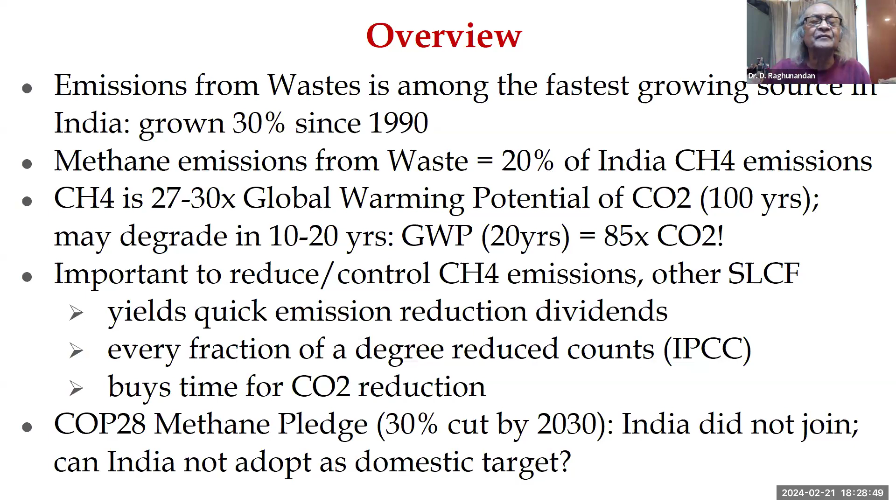Next. Yeah, so the broad status in India with regard to waste treatment is, and I think our panelists would agree with me, that currently waste handling and treatment is rather poor, is quite unregulated despite the existence of various rules and laws, and neglected, even in the large metros where there is some capacity investment, etc. So the conditions in smaller towns and cities may well be imagined.

Solid waste, there's some debate about these data, is quite uncertain, and is probably an overestimate anyway, as stated, which government agencies tend to do. We are collecting roughly 70% of waste generated. Maybe 20% of that is being treated, and the rest just simply lands in what are called landfills, but are really dumps in unhygienic conditions, polluting air as well as the water through seepage, etc., causing other health hazards through the emissions there. And you can see the methane seeping out with flames coming out, etc.

The sewage treatment capacity also is only about treating about 19% of sewage generated. But if you look at capacity utilization, that's only about 72% or so. And therefore, the net amount comes to only about treating 13% or so of the sewage being generated. So much work is needed in the metros and even more in the tier 2 and 3 towns.

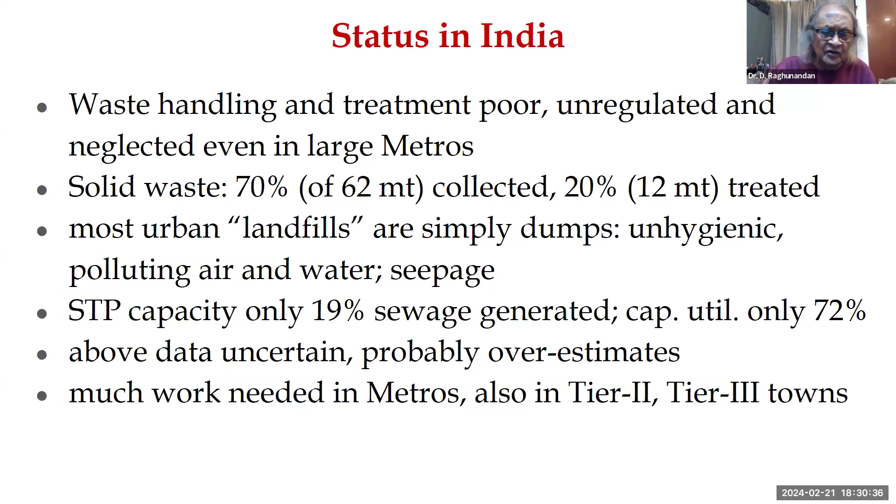Next, please. So the issues, I think, are the technology used both in solid waste as well as in sewage treatment, I think, are quite outdated. They're very far from international standards. We need to address this problem as a multidimensional approach. And a common approach that we are following in our approach paper, etc., is we are looking at these issues as problems which can yield multiple benefits or co-benefits.

Now, the co-benefit argument is it depends on your perspective, what you consider to be the main benefit and what you consider to be the co-benefit. So it's very useful to think of maybe not benefits and co-benefits, but multiple benefits. Co-benefits are useful to think of in terms of how you convince people, how you motivate people, policymakers, the public, to join such programs, to support such programs.

So a way of selling the issue of handling wastes, of treating waste, both solid and sewage, is that it will improve the urban environment, it would improve hygiene, it would help reduce pollution, improve public health, and as a side benefit, if you like, it also helps in reducing emissions. Because it may be difficult only to speak of emission reductions to public and policy planners.

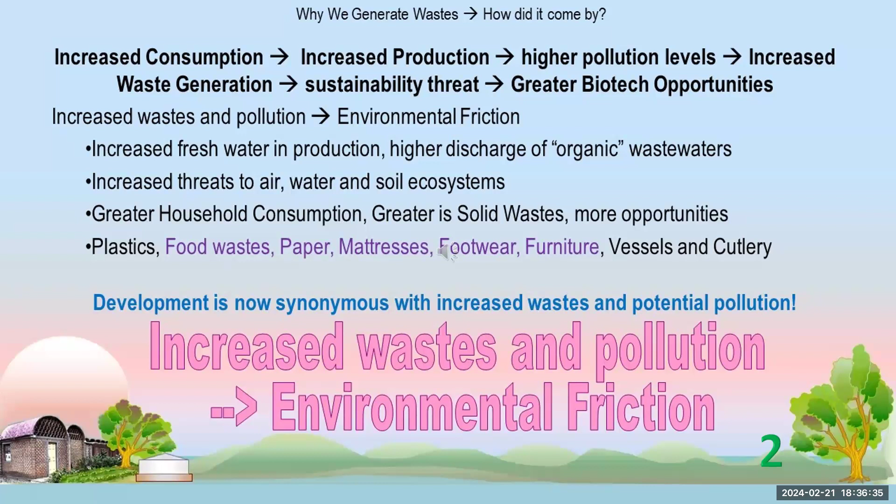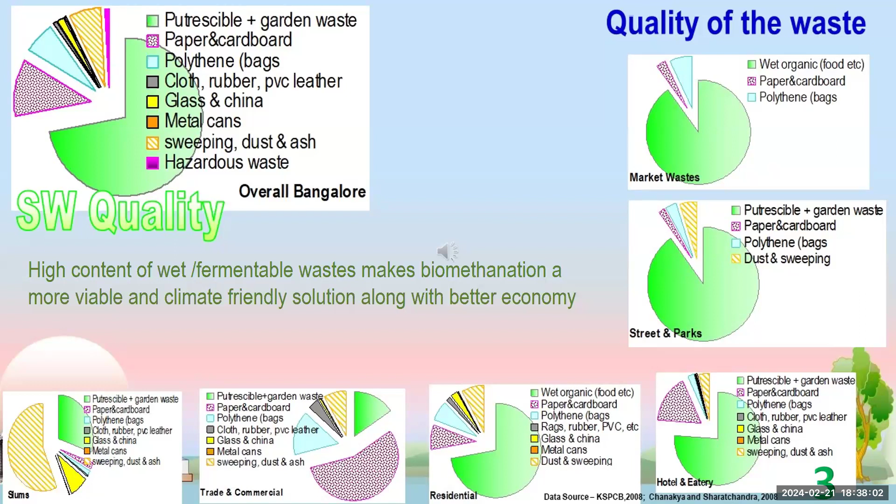Also, we find a lot more recyclable materials like metal cans, paper and plastic, cardboard, which were not there in the past, and this is something important. And since we collect them separately, the wet and the dry, it allows us to go in for a better way of recycling and reuse. And let me come back to this a little later.

Pointing out that the wastes were predominantly organic and fermentable leads us to the obvious question: do we compost or do we go in for biomethanation? Biomethanation seems to be a lot more environment friendly, as one, the methane is not being released. Second, the methane is captured and replaces fossil fuels. More important is that it also retains most of the nutrients. There is very little loss of nitrogen.

Another important issue is to understand that biomethanation as a process for urban wet waste has not been something new. Down here in Chennai, it has been tried for as much as 20 years now. But what is important are these pilots, which have shown us that it is as a process quite stable, quite easy to handle. And the bigger issue is how do I make it into a business deal. I'll come back to the business part in the next slide, in slide 5.

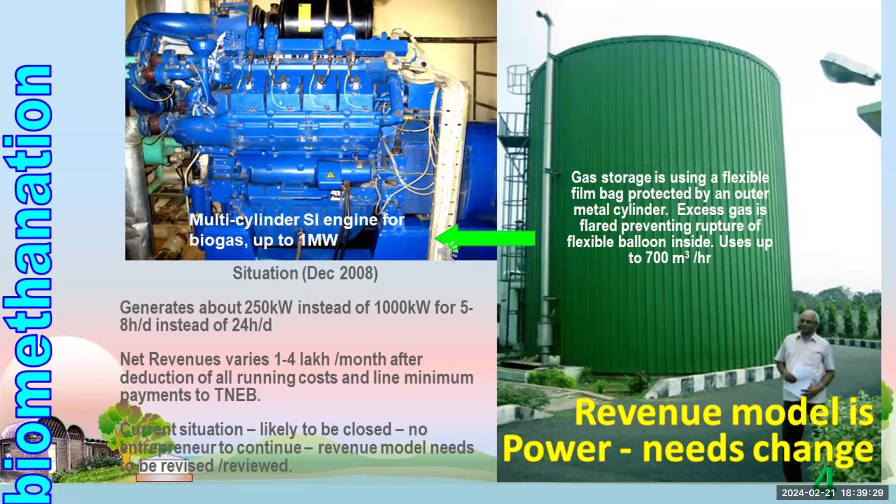To reinforce the thought that the concept of biomethanation for urban solid waste has been some time with us, I'd like to show the example of the town of Siraguppa in Bellary district, which managed to treat all of its waste without using a landfill for over 10 years. And what it did was all the wet waste it collected was subject to biomethanation. It generated power, and the residue was converted to vermicompost for its own gardens.

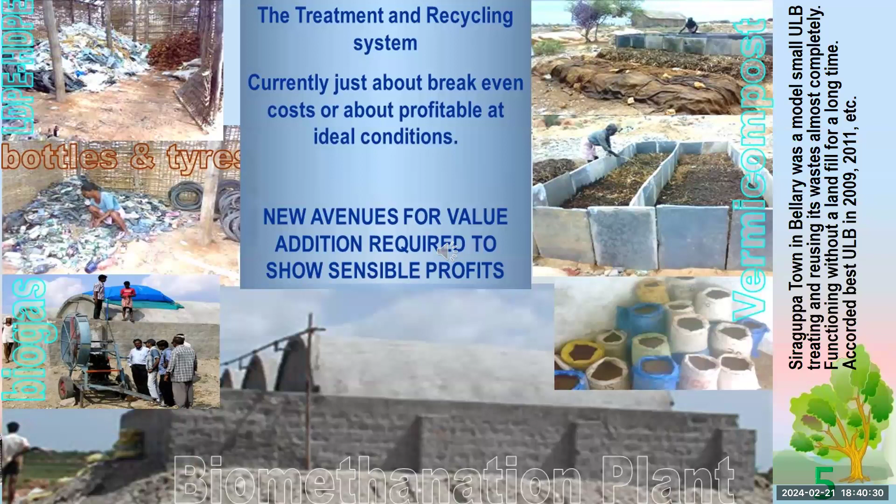While on the other hand, the dry waste was almost completely recycled, and they were not using a landfill for quite some time. This was a model small town which won the best town prize for about 2-3 years in a row.

Like this, the biomethanation of urban solid waste, which is really a wet mass with roughly 80 to 85% moisture, has seen many such starts. I call them false starts because they never turned to become a business proposition. So now it's all set for the final dash, thanks to a large extent to policy support and the market readiness the technologies have now achieved.

Very clearly, as you see in this slide, a ton of urban solid waste on the lower side would produce about 20 kgs of bio-CNG or CNG equivalent, about 50 kgs of compost, 700 liters of liquid fermented organic matter, organic manure, and carbon dioxide, which is used for disinfestation. All this put together has today a market value close to 2,700 rupees. So per ton per day, this translates to close to 10 lakhs per year.

And the cost of a full-scale plant is about 20 lakhs per ton. So you can see that the payback period has really crashed now. And so the question is, are we all now ready to take this path with this kind of policy support? Very importantly, many of the progressive towns have already taken this route and are on the verge of becoming successful.

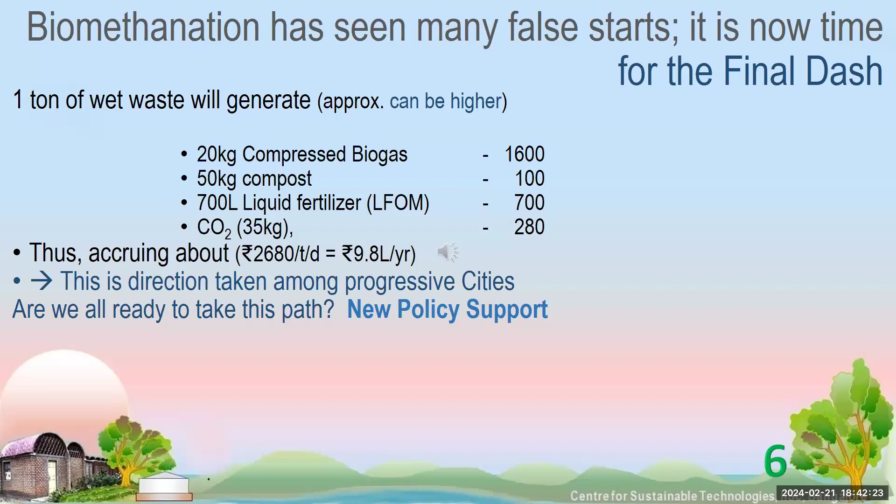For example, from the digested residue, if it is predominantly leaves, then we can generate mushrooms. If it is banana leaves, then you can make fabric. If it is high lignin material, you can convert it to lignin formaldehyde, or you can use this material as a biofilm support for anaerobic reactors. The liquid has already been shown to have some pest repellent properties, but it can definitely be used in aquaculture or algal culture. And should it have a high lignin content, then you can also induce ligninase enzyme, which can be used for other purposes.

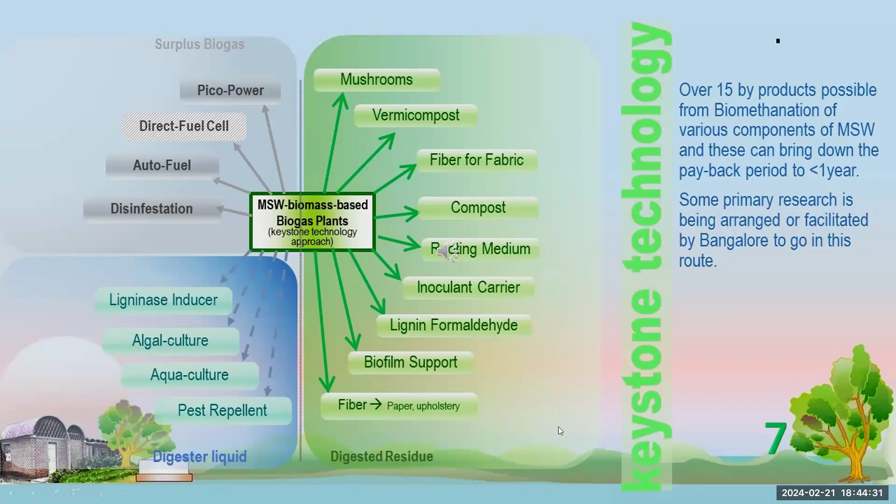Here in slide 7, I want to emphasize that although we are already looking at 15 byproducts, an interesting phenomenon that has happened, which I couldn't generate enough visuals on, is that as our lifestyle has changed, a lot more products are being generated from the dry segregated waste: from thermocol, styrofoam, corrugated paper, multi-layered plastics, and also different types of polyethylenes.

Now, I just visited a startup which was making designer tiles from plastics for indoor use, and that would be much more attractive and more value addition. So per kg you would get a lot more value. And this is the change you're seeing: the products that can be made from waste and their multiple uses are expanding, and especially many startups have taken up this area.

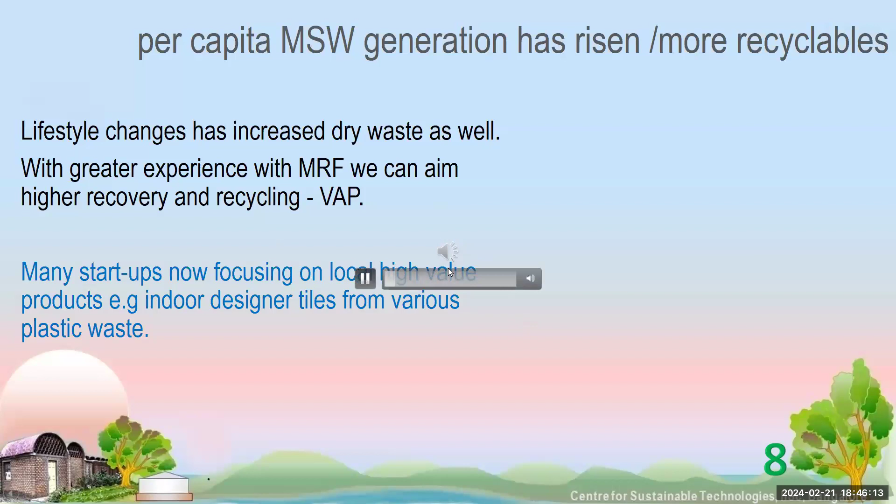Coming to the area of wastewater, all of us know that about 80% or more of the water supplied to houses ends up as sewage. Many cities have started recycling this for various purposes, especially for local uses. And as a national policy, we have now tried to bring it into various schemes so that water is treated and reused locally. Even in rural areas, as we have supplied more than 55 liters of water per capita per day, most of it is now turning into grey water.

This grey water somehow ends up, because every village has some water body nearby, contaminating it. The most important part is how do we treat this water locally, prevent it from contaminating local water bodies, and find a very sensible and economic reuse sector. And please remember, sewage and grey water have different problems. Sewage has only human waste, whereas grey water has a whole lot of household chemicals, which makes it a lot more difficult to treat.

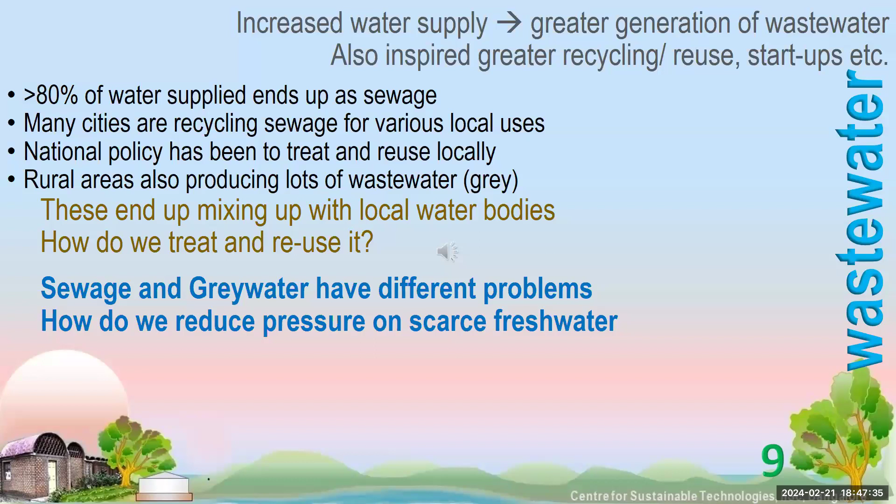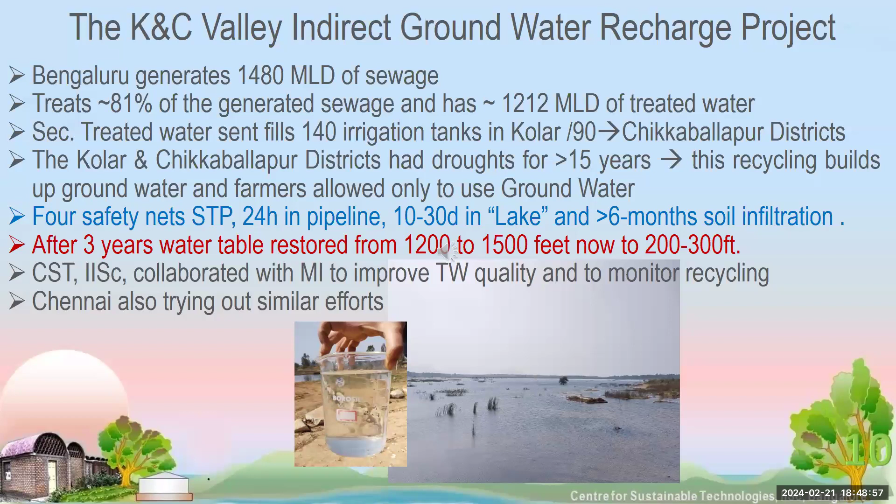Now, Chennai is also trying something similar, where it's trying to improve water security, especially drinking water security. Here it must be understood that each location will have a different set of problems you want to solve. What has happened in the last 3 years is that the impact of droughts has now been reversed, and land alienation, which was a very common phenomenon, has also been reversed. Horticulture is back in vogue, and that has become the tomato capital of the country. Out-migration has been reversed. Industrialization has started.

And as you see in the pictures, the tanks are almost always full throughout the year. And the water quality, as you see in various containers there, is quite clear. So this treated water has become a high-value commodity for the local people, and has also become an exemplar for a large part of the world, because this is one of the largest in Asia, and in the world it reaches out to a huge number of people. And that's how it stands as an example for others to emulate.

Based on these kinds of successes, water recycling and reuse locally has become a very important aspect of various urban habitats. So much so, in a couple of cities now, the concept of a waterfront, even in a semi-arid area, has become possible because recycled water has been brought back into local use. People are restoring local water bodies, sometimes merely for aesthetics, sometimes for creating bird habitats. And of course, in Chennai and various places, water security also has been looked into.

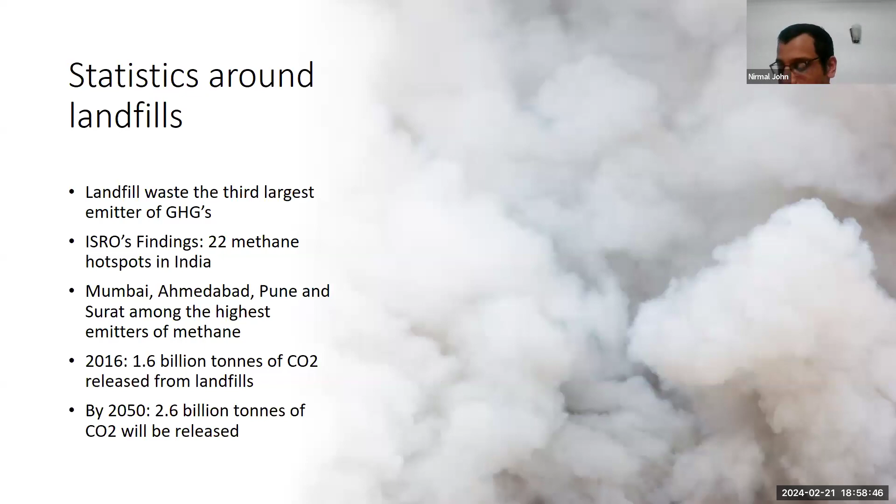Methane is particularly dangerous because it's primarily responsible for landfill fires, particularly during the summer seasons. We saw that happen in Kochi last year. We saw this happen also in Delhi's Bhalswa landfill as well. But there is a way you can circumvent all this.

Studies have shown that you can reduce your greenhouse gas emissions by 6 to 8% if you're actively involved in reducing your food waste. You can prevent food waste from going into landfills by either composting it or converting food waste into biogas, which is a cleaner alternative, of course, to fossil fuels. Hence, waste segregation and subsequent composting of waste is vital, as it not only prevents the release of methane gas in landfills, but can play a significant role in preventing the accumulation of waste in landfills.

And I'll end here by talking about the kind of work, among the many things we do at Chintan; we've also been very actively involved in the diversion of this waste from landfills. And we've been doing that through an MRF that we had instituted that was recently commissioned in February 2021.

So in Feb 2021, Chintan, with support from the Municipal Corporation of Delhi, North Delhi, and with funding from the Coca-Cola Foundation, was able to set up a material recovery facility in Zakhira. Zakhira, for those not familiar with Delhi's geography, is in North Delhi.

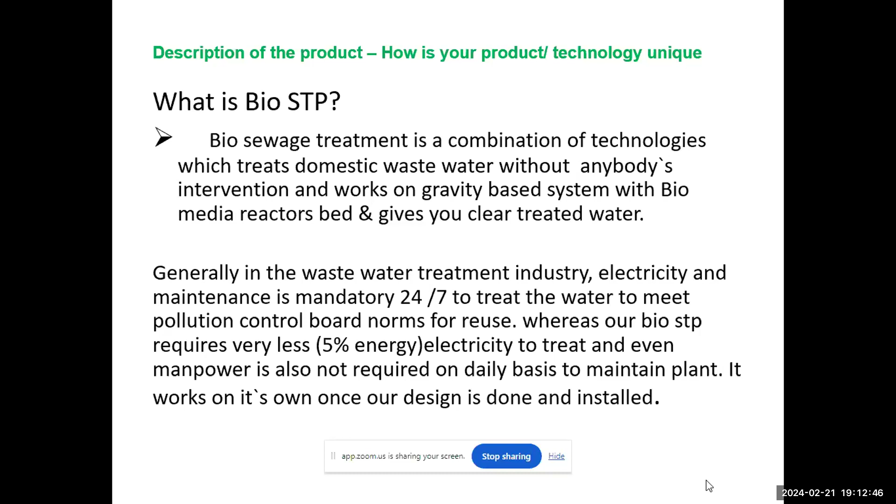In this bio-STP, the biggest advantage is we don't require operators at all. The entire plant runs on its own because 90% of the process happens through the media along with a gravity-based system. From collection till the final treated water tank, it happens only by gravity, meaning we don't require any operators to run the plant.

Number two, we were talking about methane emission and carbon footprint. Here the carbon footprint is saved by close to 90% because we don't use any pumps and motors at all. 90% of the plant treats only through microbes, enzymes, and media. The media life is also a minimum of 20 years, and that media need not be replaced every year. 20 years is the minimum, it can go beyond that too. That's the kind of media we provide.

It is almost like a fit-and-forget treatment plant. The biggest advantage in the final tertiary treatment is that even a slight odor is not acceptable to people, they find it very offensive. That is where, to support them additionally, we give a final treatment process of ozonation, which kills the entire microbes in the system and makes it 100% crystal clear, odorless water that meets pollution control board norms. You cannot even tell the difference between RO water and sewage treated water, that's the kind of quality we deliver. This is because we use ozonation at the final stage, which oxidizes further and removes all the suspended solids to make it clear water.

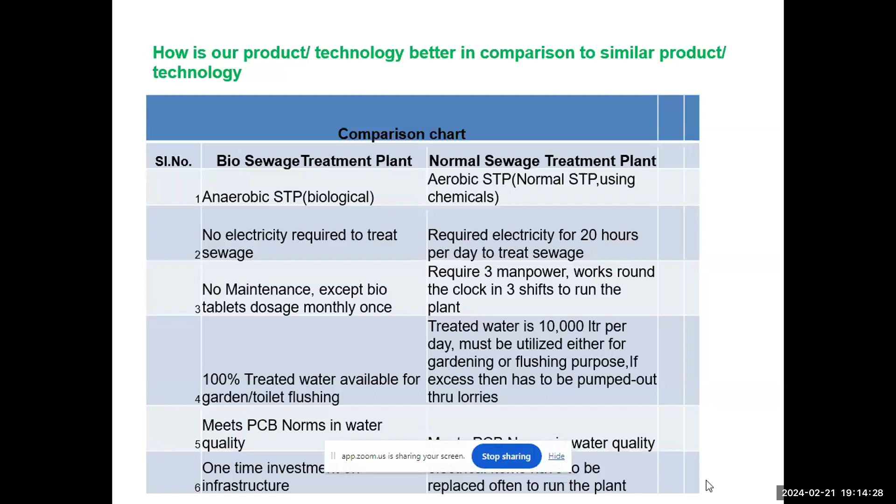The biggest outcome of the technology is that we can reuse this water, or release it into a lake or river, or use it for underground recharge. We can control soil and air pollution, and save huge amounts of water by recycling it. One use is toilet flushing and gardening, but mainly I am exploring selling this recycled water.

In the previous presentation he was talking about it, but I am already on the job in Bangalore. Today we got about 3 lakh liters of treated water that a client requires. They are willing to pay for both transport and the cost, about 350 rupees for 6,000 liters. We finalized this today; over the next 4 days he needs about 3.5 lakh liters of water, and we have a 100 KL plant in Bangalore. We tied up both parties, and now the vehicle is ready.

One side earns the money, whoever has put up the plant. The other side, the buyer, is actually in the construction industry. He is buying this water for soil excavation and leveling, and also for construction purposes. Imagine 3.5 lakh liters, if he buys fresh water, how much cost would he incur? And in this summer, they are not able to get water at all.

That is where the demand for treated wastewater has come up now, and we are getting lots of inquiries. Our focus is that whatever water is treated, when it meets the parameters, that water definitely has a use for industrial purposes, gardening, and agriculture. In this summer, agriculturists are struggling a lot to get water, their bore wells have dried up. By making these STPs functional, this treated water can help, because most apartments with 100 KL or 200 KL plants are only able to use 30 to 35% of the treated water.

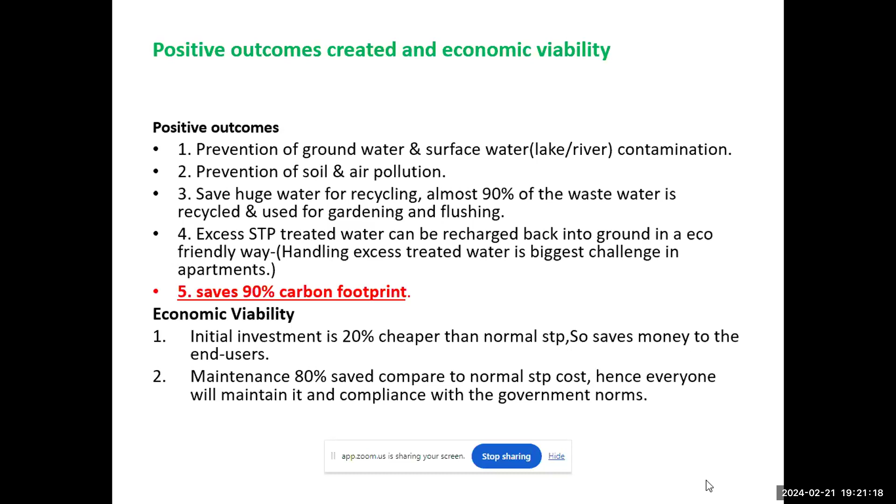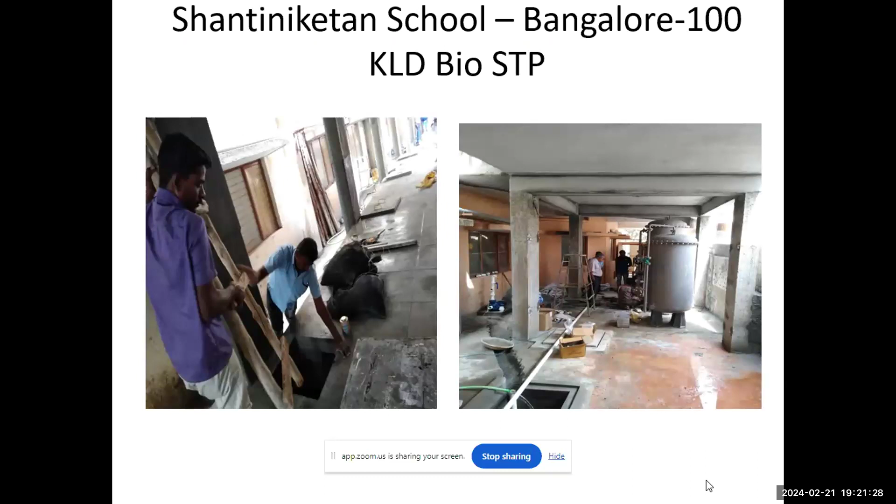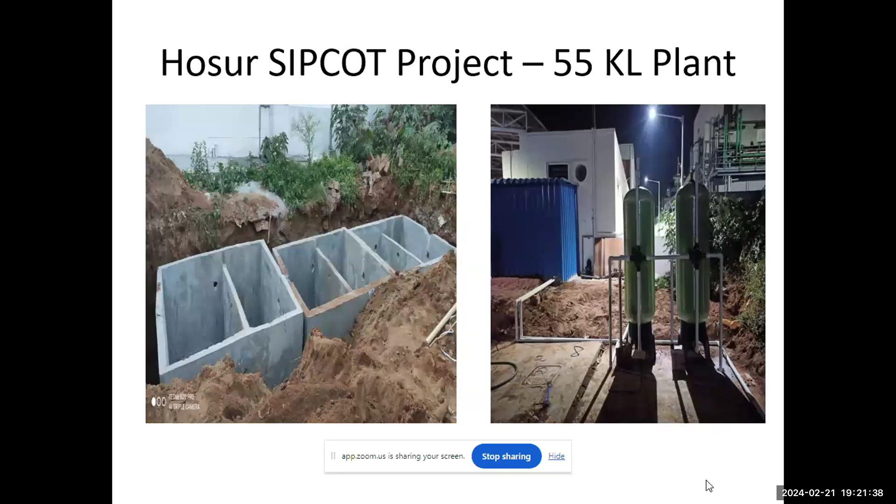I want to showcase some successful projects. This is in Shantiniketan in Bangalore, about a 100 KL plant running for the last 5 years. This is another project, a 50 KL plant for a Star Hotel. And this is a Hosur SIPCOT project, a 55 KL plant running for the last 1.5 years. This is the treated water quality.

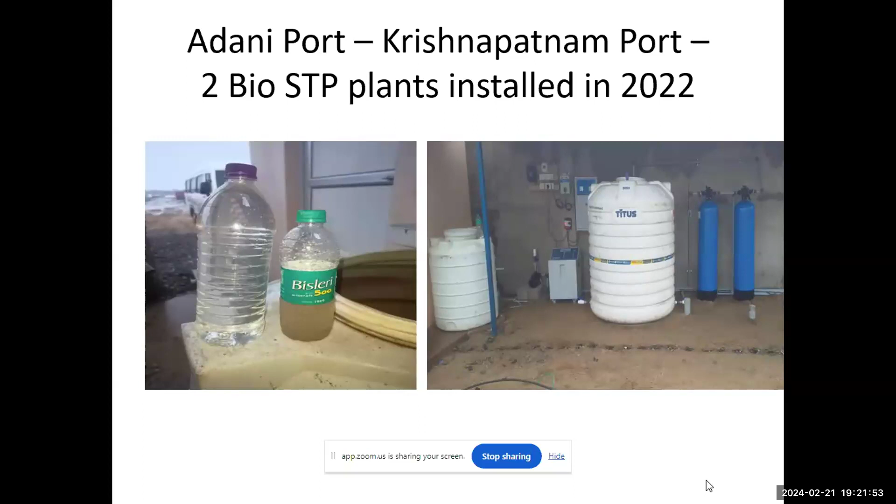This is Adani Port in Nellore we have done. One project last year, and we executed a second project also. This shows how happy the customer is.

This is Tamil Nadu Golf Federation, on Mount Road. Here, the beautiful thing I've done is, for ETP - effluent treatment plants - you have more contamination due to oil and grease. So we applied one more application where we use oil cakes treated with colonies of bacteria which degrade the oil in the chamber itself before letting it out to the collection tank. From there, as usual, through the bio-STP process, we treat it. It's running very well here.

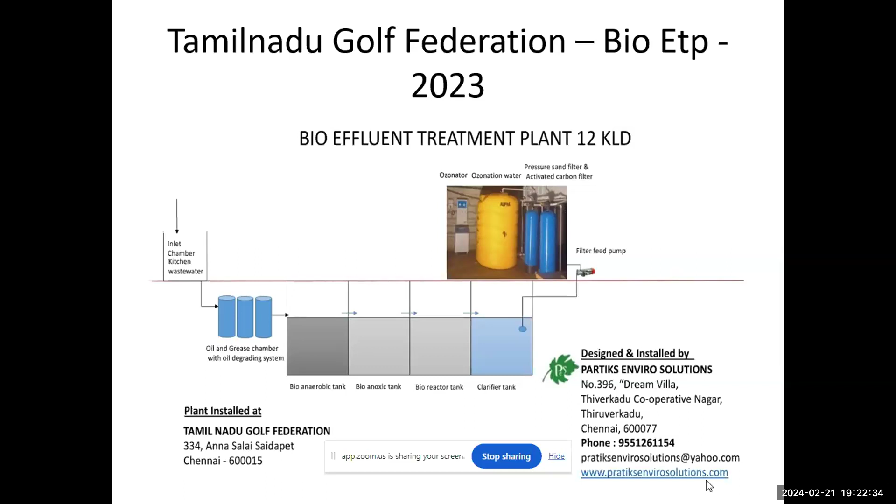They'll only have a little bit of gardening, because most smaller apartments with 5 or 6 houses never have garden space. So in that case, where do they let out the treated water? That is the challenge - everywhere we go, ultimately they're willing to invest money for the STPs, but they don't have an option for disposal of the treated water.

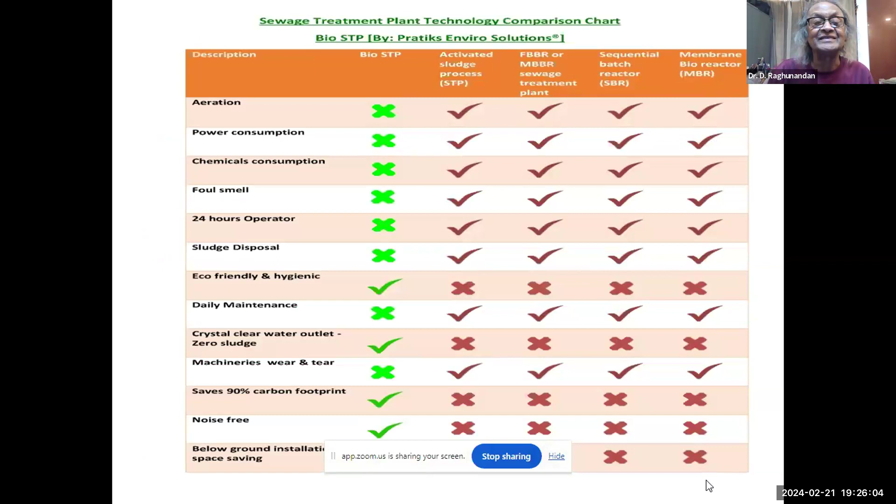And this is the comparison chart. Anyway, you can go through it. Maybe all these test reports, we can share later also.

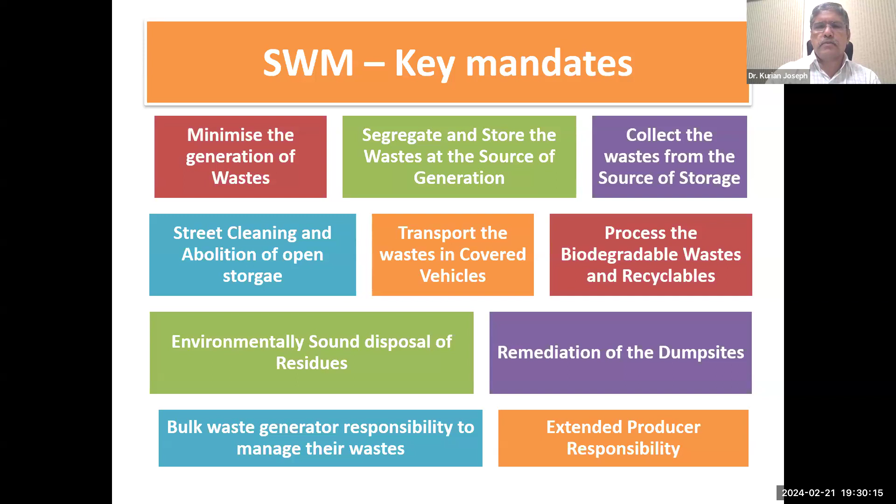And there are also specific responsibilities for those who generate this waste in bulk and also those who are the producers, especially of the packaging category, in terms of extended producer responsibility. In spite of this legal framework, all of us are aware that there are deficiencies, which start with poor segregation, limited storage in public areas, transportation in open trucks, very little processing, and unscientific disposal.

And if we ask why it is happening, we have several reasons to put and blame on each other. Very often the challenge, especially from the municipalities' point of view, is that they say the public is not aware, not cooperating, not participating. We don't have land to locate the facilities, and the private people are driven by profit. So we are also not able to create an economically viable business model by which private entrepreneurs can come in and play a crucial role in waste management.

It is in this context we should look at the waste management and climate change connection, as already indicated by Dr. Raghunandan in his introduction. There are several positive and negative connections between solid waste processing and climate change. And it starts with emission of methane, which comes from the biodegradable waste which we dump.

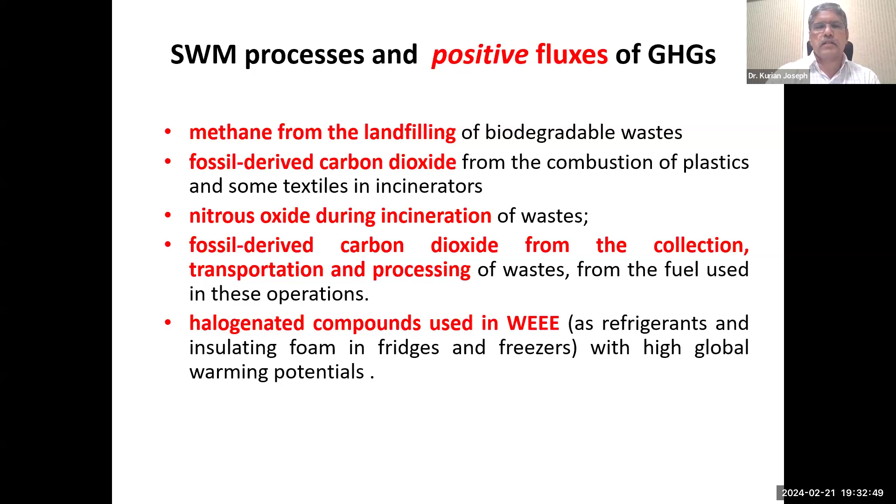And it is also connected with the burning of plastic, which is similar to burning of fossil fuel, because the origin of plastic is fossil fuel itself, nitrous oxide from combustion processes, and the carbon dioxide that gets emitted when we burn or use fuel for transportation or processing of waste, and especially electronic waste. There are also other types of greenhouse gases.

Now, solid waste processing also has negative fluxes, which means it can help in addressing climate change in terms of the energy that we could recover from the processes to replace energy from fossil fuel-based sources. Recycling of waste limits the need for producing new materials, which is energy intensive. So the energy efficiency that we get in terms of material recovery, reducing, and also the use of compost, which is an excellent additive to enhance the soil carbon and also carbon storage.

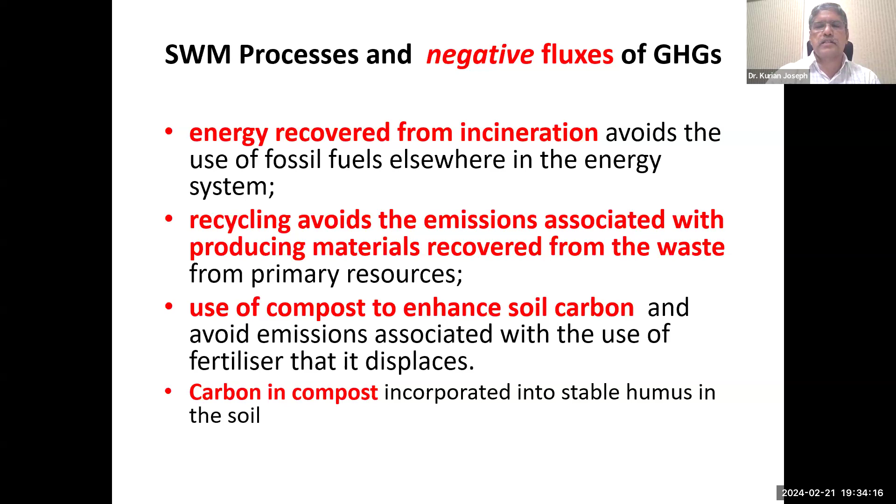The carbon in compost, if we can incorporate it in the soil, that is a long way of storage of the carbon, because the carbon from the atmosphere is fixed in biological materials, and that we compost and put it back. We are in a way capturing the carbon from the atmosphere and storing it in the soil. So there are positive and negative connections.

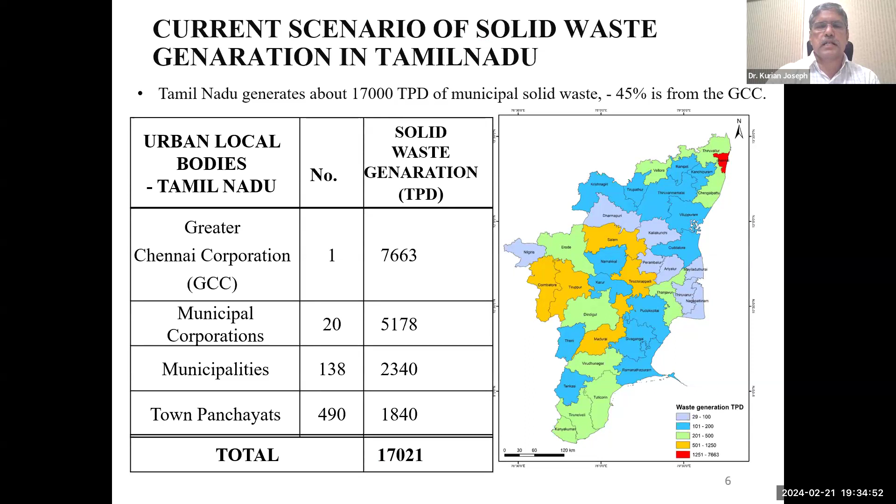And when it comes to the waste generation scenario in Tamil Nadu, we have done a recent assessment which tells that about 17,000 tons of municipal solid waste is getting generated in Tamil Nadu, of which almost 45% is from Chennai. That is about 7,600 tons every day. And of these 7,600 tons, in terms of wet waste processing, about 1,000 tons get processed in micro composting centers, bio-CNG plants, green waste, that is garden waste processing, and also small biogas plants, etc.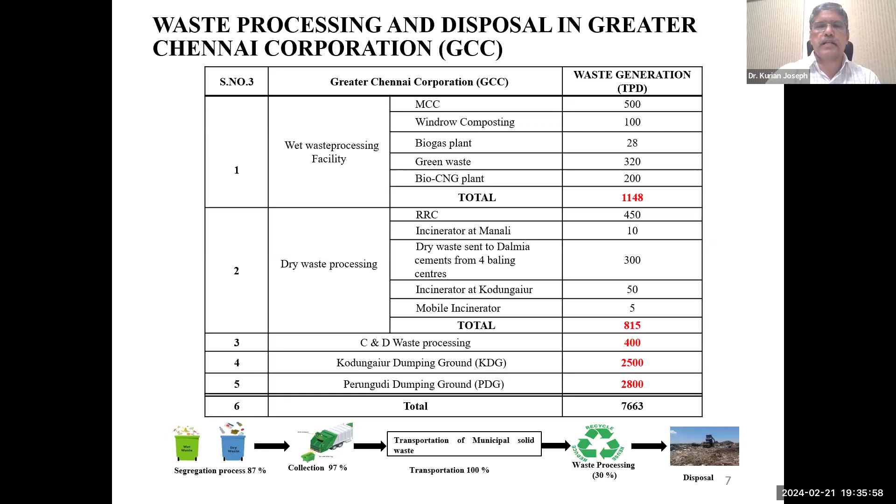And about 800 tons of dry waste also gets recycled or diverted by recycling facilities or waste to energy facilities. But still, we have about 5,000 plus tons of waste which is getting dumped in two dump sites, the Kodungaiyur dump site and Perungudi dump site, which on average receive about 2,000 plus tons of waste every day. And if you look at the quality of the waste that gets dumped after diversions, we could see that almost 50% of it is biodegradable waste.

And if biodegradable waste is getting dumped, we know methane emission is a possibility. We have done an estimate, and our estimate says that every day about 150 tons of methane is getting emitted from the different dump sites. So how do we deal with this waste that is getting dumped is the basic question.

Of course, for the biodegradable waste, there are only two routes possible. For easily biodegradable waste, we should take the biomethanation route or the bio-CNG route, and the rest of the waste should take the composting route. And that is the model that Tamil Nadu is following. And to the extent possible, this should happen as close to the source of the waste as possible. So composting and biomethanation should happen in a decentralized manner, the approach which Ms. Dakshayani was talking about for liquid waste.

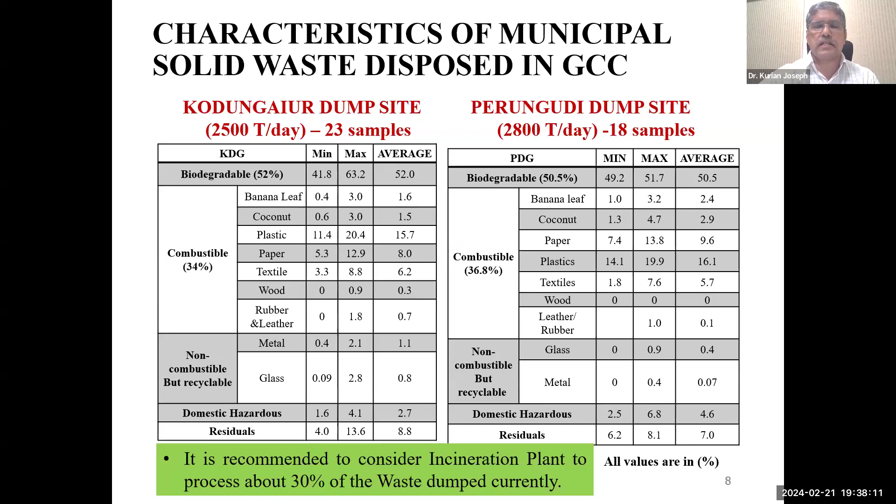And when it comes to the recyclables, part of it is combustible, and to the extent possible, we should try to recycle. But still, our studies show that about 30% of this combustible waste will be contaminated and will be non-recyclable combustible waste, for which we should also have a waste to energy facility. So if we have this integrated approach, a waste management solution will emerge.

And in the Chennai context, of course, the waste quantity has increased, but there are also several initiatives which the city corporation is doing. It starts with waste segregation promotion. Almost 95% of waste collection up to door-to-door level is happening. And there is also a great effort initiated in the past 1.5 years with reference to promoting waste segregation.

And to minimize greenhouse gas emission during the collection and transport process, the collection vehicles have been fully made battery operated. So that is one initiative. There are about 5,000 plus battery operated vehicles which are used for door-to-door collection. The transport vehicles also have been renovated with BS6 compliance and fuel efficiency. That also contributes to significant reduction in greenhouse gases.

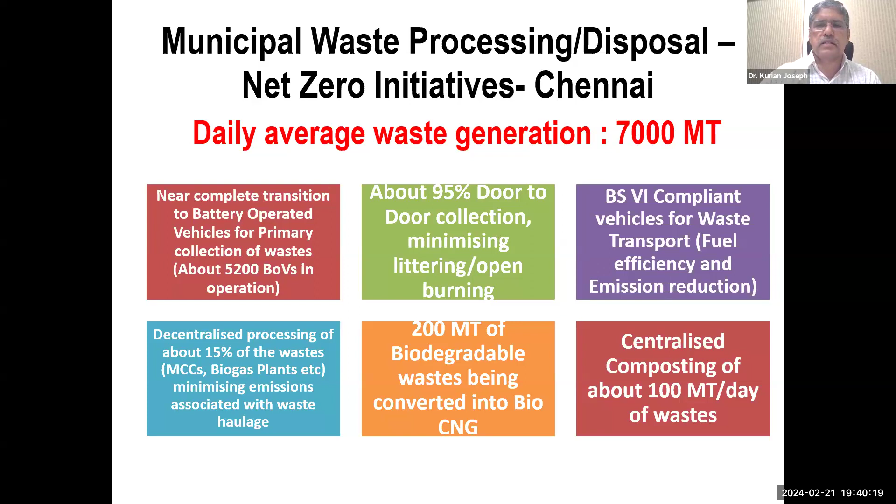Decentralized processing of waste: about 15% of the waste gets processed in a decentralized way through micro-composting centers or biogas plants. There are two big biomethanation plants or CNG plants in operation, which take care of about 200 tons of waste every day. There is also a centralized composting facility of 100 tons. But this is not enough to deal with the 7,000 tons of waste that we are generating.

So there are several projects in the pipeline, which include additional capacity for biomethanation, additional capacity for the MCCs, micro composting centers, increasing the resource recovery centers. In addition, we have the C&D waste and the garden waste, which itself accounts for about 1,000 tons per day. So there are 2 C&D waste processing facilities and 2 garden waste processing facilities, and this is diverting about 1,000 tons of waste per day.

And not only Chennai, almost all the urban local bodies of Tamil Nadu are very active in dealing with the dump sites, remediation of the dump sites through the bio-mining process. In Chennai, out of the 2 dump sites, at Perungudi the bio-mining of 32 lakh cubic meters of legacy waste is already nearing completion. And at Kodungaiyur also the bio-mining process is going to start, by which about 65 lakh cubic meters of legacy waste will be recovered and processed, and it will be reclaimed as bio-earth or inerts, and the RDF, which could substitute the fuel requirements in cement plants.

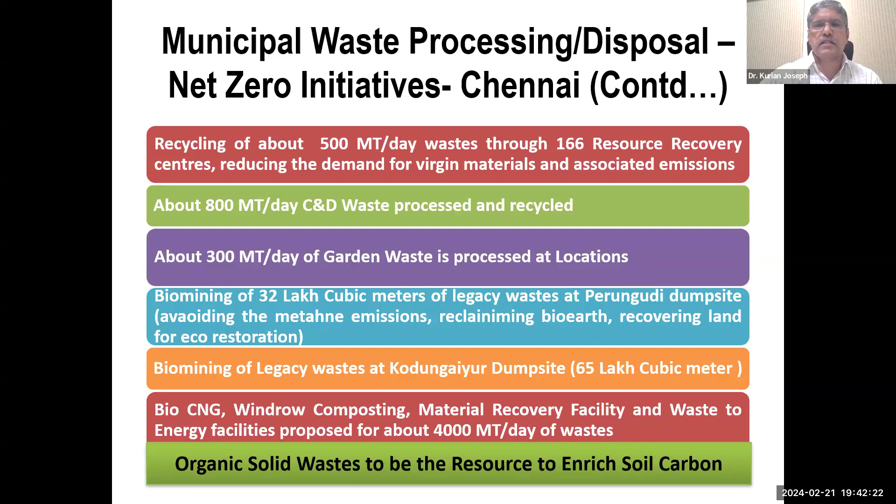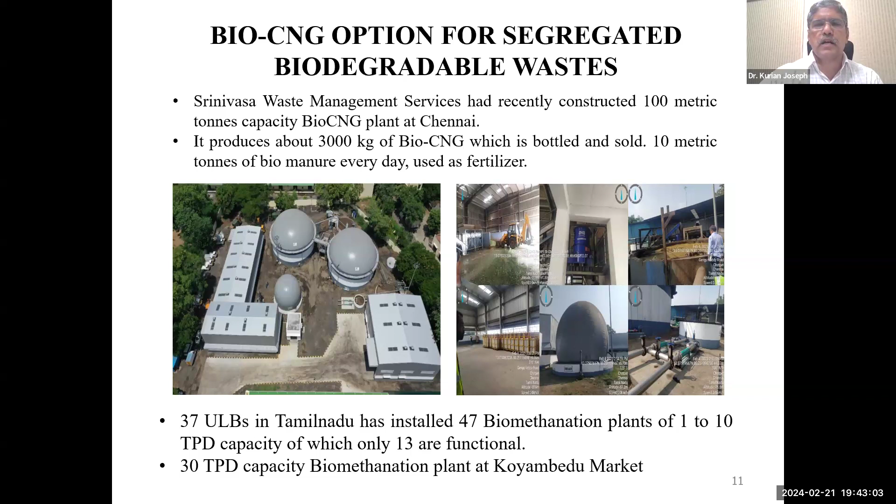So to a great extent, we can say that efforts are there now to address the solid waste, but it requires the support of the different stakeholders, including all of us who are the generators of waste and who have to support the waste management facilities, especially by segregating the waste. This is one of the bio-CNG plants which was set up 1 year back, which is operating very well in terms of processing 100 metric tons of biodegradable waste, and the bio-CNG that is generated is bottled and sold.

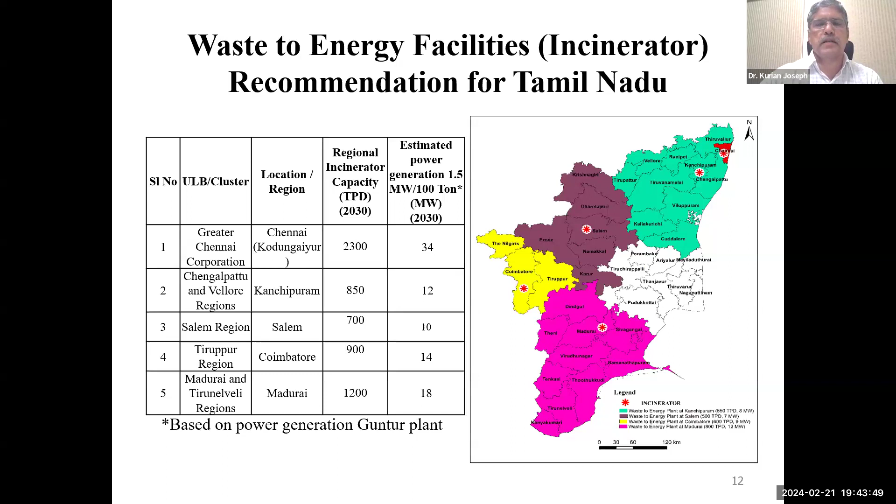And we have also done an analysis of waste to energy facilities and where they need to be located. This was a study undertaken on behalf of the State Department of Environment, where we have suggested centralized, regional waste to energy facilities to come up in at least 5 locations of the state, which will be able to cater to the non-recyclable combustible fraction of the waste, by which we could also recover the energy.

So to summarize, I will say that waste processing or waste management is not just a technology issue. And very often where we fail is in terms of this integrated approach. Very often we focus on one element or the other. It has got the different elements of waste reduction, segregation, storage, collection, transport, processing, and residue disposal. And that involves at least these 7 M's.

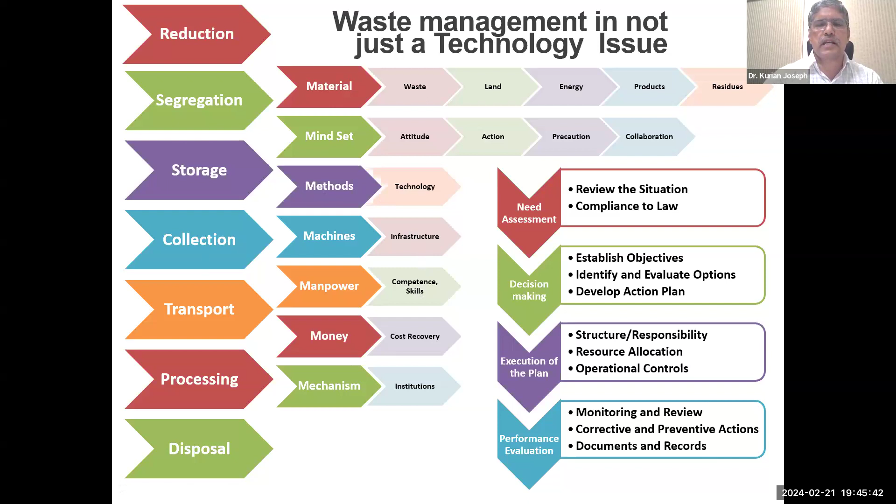The material aspect means the waste, and if you have to manage the waste, you require land and also energy. The products or the residues of waste processing also need to be taken care of. And of course, the public and other people who are associated should also have the right mentality to collaborate, especially in terms of minimizing the waste, segregating the waste, and also paying for waste management. There are technologies which are well established, but such facilities need to be developed, and we also need competent people who will be able to operate them, and also the ecosystem by which business players can come in and take it forward.

So I will conclude by saying that waste management means we should be looking at the circular economy. Waste is something which we should minimize and it should get back into the loop. Liquid waste is homogeneous in nature, but solid waste is highly heterogeneous in nature. So prevention of waste should be the starting point, and that message should percolate down. Of course, we can't prevent all the waste, so we should also segregate.

And just sorting doesn't mean that it will lead to recycling, so the sorted waste should go for recycling. And being recyclable doesn't mean that it gets recycled, and recycling also doesn't mean that it gets into the circular loop. So let us do whatever we can do as individuals, and whatever the waste managers, especially the municipal authorities, are required to do, so that we'll be able to use climate change as one of the reasons to address waste management.

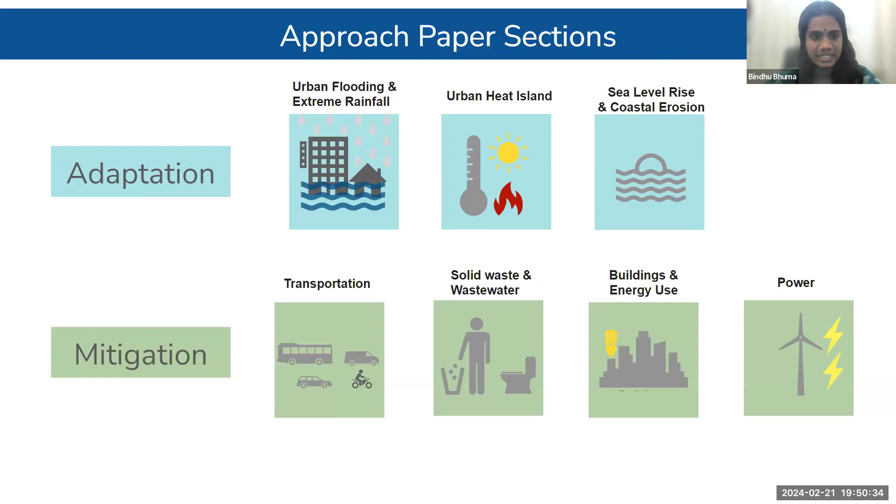A very peculiar aspect of the paper is that we emphasize actions with co-benefits between sectors across the adaptation and mitigation theme. This is also a work in progress document that we would like to keep iterating upon interactions with various stakeholders and experts. Very briefly, the approach paper has two main sections, adaptation and mitigation, as you can see in this slide. And today we will specifically be focusing on solid waste and sewage.

I am going to jump straight into the issues around Chennai's waste management. We've highlighted around 6 main issues, and the first one is its high waste generation. Chennai generates approximately 0.75 kg of solid waste per capita, which is one of the highest in the country. The waste sector in the city is the third largest source of emission. 13% of Chennai's emissions are from solid waste and sewage, which amounts to 1.9 million tons carbon dioxide equivalent.

The second issue that we want to focus on is the lack of efficient source segregation. I think this is the key issue behind the loopholes or the gaps in the waste management system of Chennai. There is absolute inadequacy in source segregation and collection. There are a lot of efforts being taken, but it is all happening in bits and pieces. There is no chain of events happening to make it more efficient. And when we look at what percentage of households are really segregating waste at source, there isn't much awareness, and not every part of Chennai is doing it.

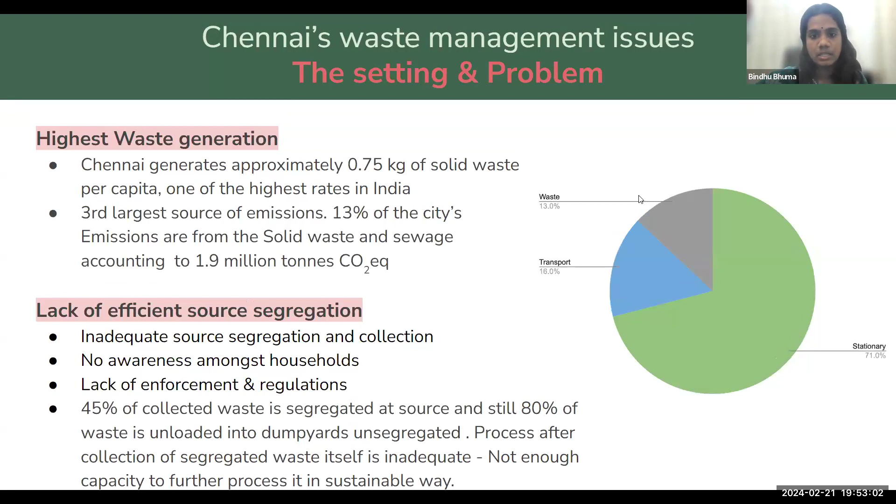Thirdly, I think we have to speak about the unscientific dump yards. The city has two main dump yards, one at the north and one at the south, the Kodungaiyur dump yard and the Perungudi dump yard, which are currently mere dumps that are very unhygienic, causing air pollution and contaminating the nearby water bodies and the soil. These are two mountains of legacy waste amounting to a total of 94 lakh cubic meters that has been accumulated. And these are enormous sources of methane in the city.

Various research and studies have found that municipal solid dump sites release 60% methane, 40% carbon dioxide, and traces of other harmful gases like ozone, nitrous oxide, and fluorocarbon. And lately, the city corporation has been taking steps in order to make these dump yards into more scientific landfills. For example, we did see in the previous presentation by Kurian sir on lines of biomining that is happening in the two dump sites, and I think it is a good way forward.

The next issue we want to focus on is the insufficient recycling capacity. Although the CCAP states that there is 20% waste that is being segregated and recycled, there are so many reports that say only 4% of it is actually being recycled. So lack of decentralized recycling centers, and in general, lack of capacity to recycle is something hard hitting for the city in these times.

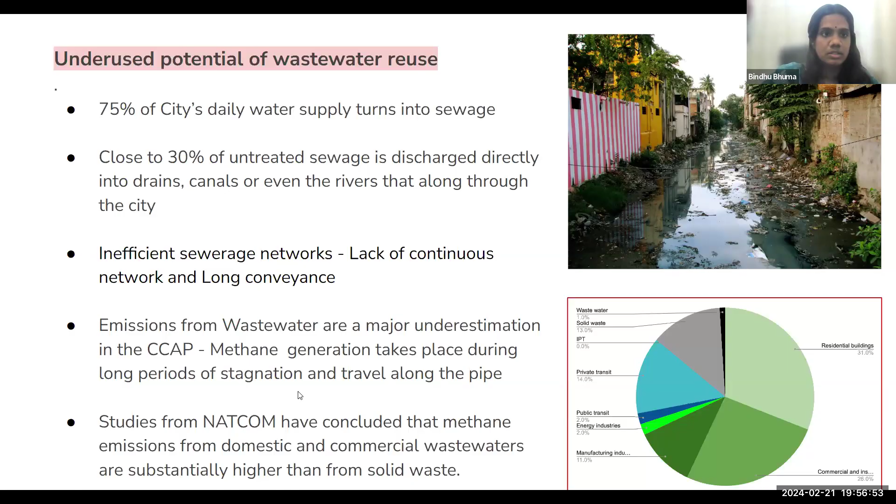We then move on to potential solutions. Well, obviously, we start off with effective source segregation. We're talking about 100% source collection and segregation, which is the key to an efficient waste management. There need to be more IEC campaigns for household level segregation. And like I mentioned, we need to have strong enforcement and regulations from local governments. It could be in the form of incentives or even penalties, like how some neighboring cities are doing.

And another important point that we wanted to bring forward was that in the official CCAP, they have proposed 100% home-based composting. While 100% segregating is possible, 100% home-based composting looks a little impractical. Not everybody would have the time to do it, or the area to do it, or the knowledge to do it. So that looked a little impractical on the document.

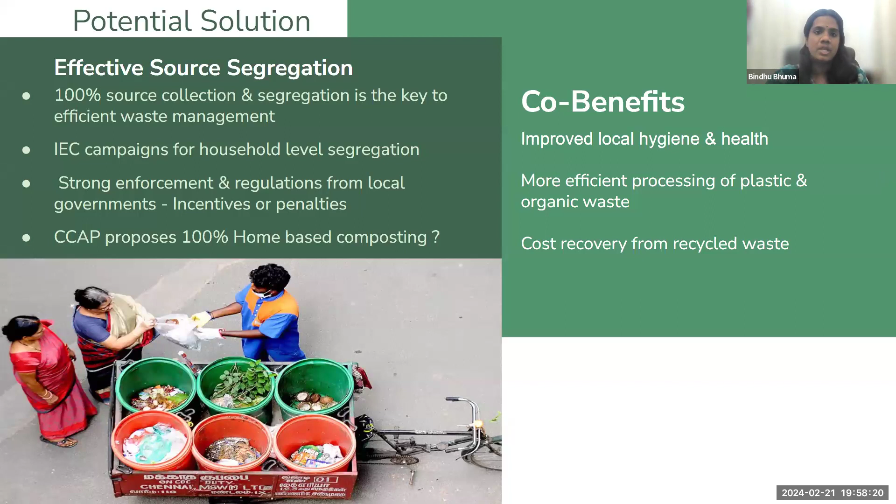Coming to the co-benefits of this particular solution, we definitely are going to have improved local hygiene and health, more efficient processing of plastic and organic waste as we have better segregated waste, and also the cost recovery from recycled waste. These are some very evident co-benefits from effective source segregation.

The second potential solution that we would like to propose is more efficient and scientific solid waste processing. We've seen that the processing of solid waste, the percentage is very less. I think even the targets that have been mentioned in the CCAP, for example, for plastics, the target for 2030 and 40 has been only 20%, and for organic waste it was mentioned as 60%. These targets look very underestimated. I think there is potential to increase these targets to at least 50 and 80% respectively.

And we've had some wonderful presentations on biomethanation and composting, which is something we would like to push forward in terms of solid waste processing. Biomethanation especially, which is a very clean and economical method, space efficient, and with maximum methane capture that can be further used and sold, and it could meet least resistance from local or nearby residents. So that is something that we would really like to highlight as a potential solution in terms of solid waste processing.

And some co-benefits which we would like to point out are definitely the business and employment opportunities in the recycling and waste processing sectors. I think that was very evident in the previous presentations. Secondly, the potential for alternative energy use, especially with the whole methane recovery and use. Thirdly, reduction of local pollution. I think this could even be a direct benefit of it. And fourth is the reduction in water and soil contamination, especially in and around the dump yards, which is currently a very big issue.

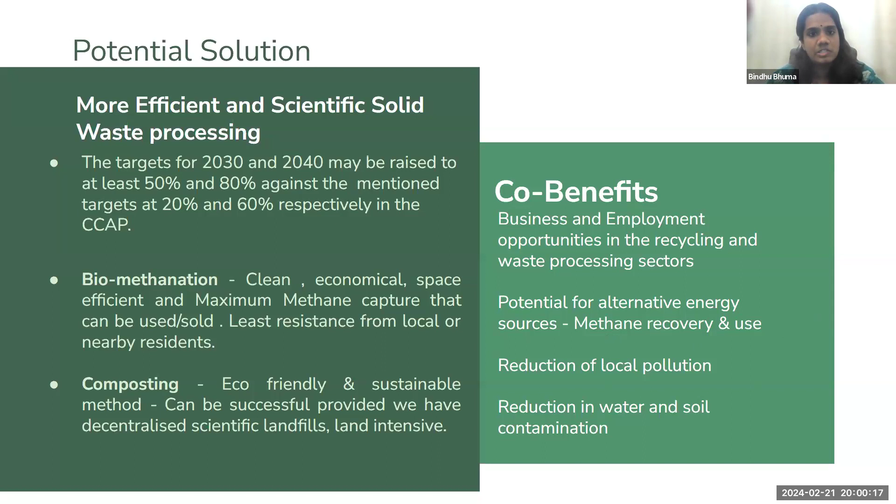This could be avoided if we move to a more efficient and scientific solid waste processing. Another solution is to focus on scientific landfills—transitioning from mere dump yards to scientific landfills with methane recovery. Biomining is one thing happening in Chennai with methane recovery, resulting in more hygienic surroundings and better livability, redefining the nature of dump yards. People living even 3 kilometers around dump yards face problems of foul smell and air pollution, and I think all of this could be addressed by having scientific landfills.

We also have heard about landfill parks. The potential for these areas to become recreational spaces after the digestion of waste is another co-benefit we thought of.

The next potential solution is wastewater treatment, recycling, and reuse. We've seen great examples of this in previous presentations. It's fundamental to address, but sadly we are not doing this at a larger scale, and there needs to be zero discharge of untreated sewage into water bodies—that is unacceptable. Once you recycle, you get grey water that can be reused for multiple purposes that contribute to the city.

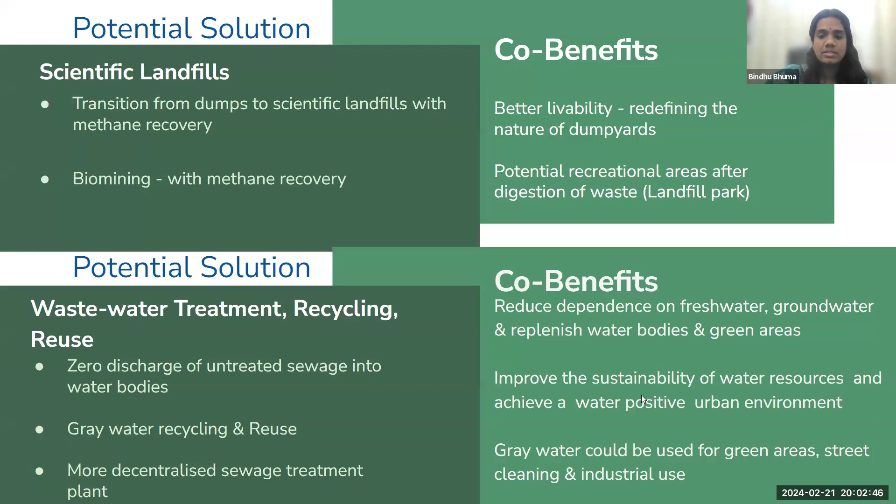Some co-benefits of this solution are obvious: reduced dependence on fresh water and groundwater, and replenishing water bodies and green areas. There is great potential to improve the sustainability of water resources and achieve a water-positive urban environment. The resulting grey water could be used for green areas, street cleaning, and industrial purposes—we've even seen an example of treated grey water being used for construction.

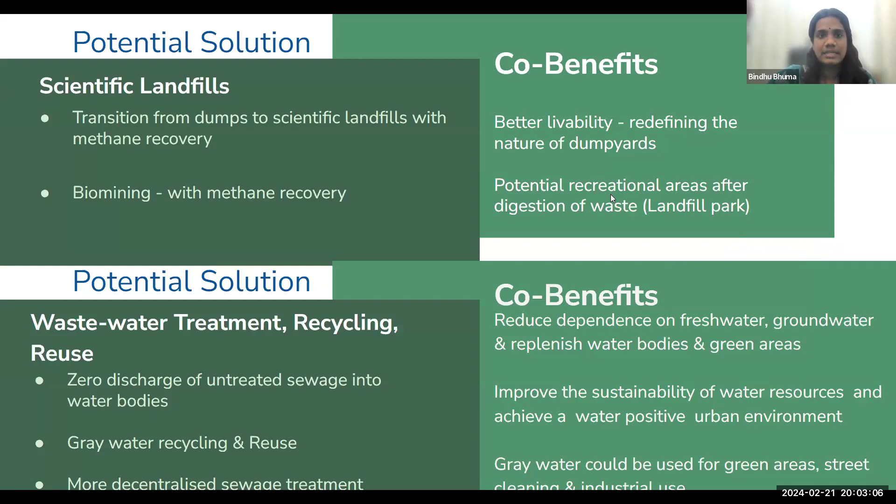I literally ran through the presentation because of the time crunch. In conclusion, we would strongly advocate for the decentralization of solid waste and sewage treatment and the affiliated processes, especially in order to promote more efficient collection, segregation, and processing. With that, I would like to conclude the presentation.